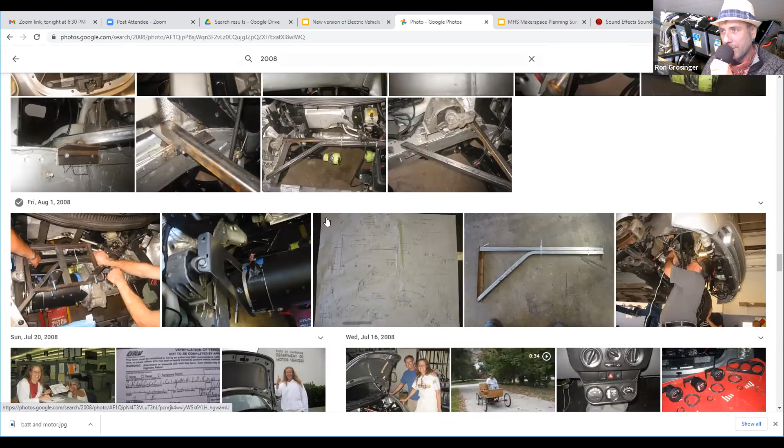So that was 12 years ago, and since then I took some of the things we learned. Like, here's an example right here. This is the original transmission. Can you see my mouse?

Yes. Okay, this is the original transmission. We made brackets and we installed a DC motor. And we put the batteries on top, but we made it all removable. That's a key thing you have to think about, because you might upgrade later, or you might have to do some servicing. You definitely want to make it serviceable.

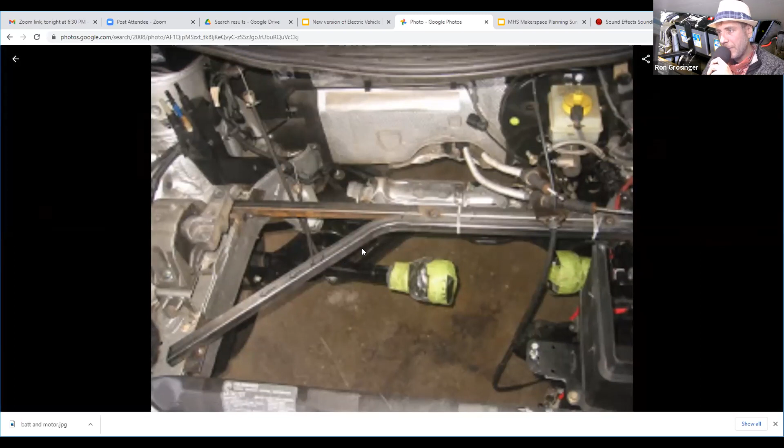You don't want to weld right to the chassis - that's an amateur move. You definitely want to weld your brackets, but then bolt it to the chassis. And that's something I tell people all the time. So here was the bracket that we made that carried the batteries on top of the motor.

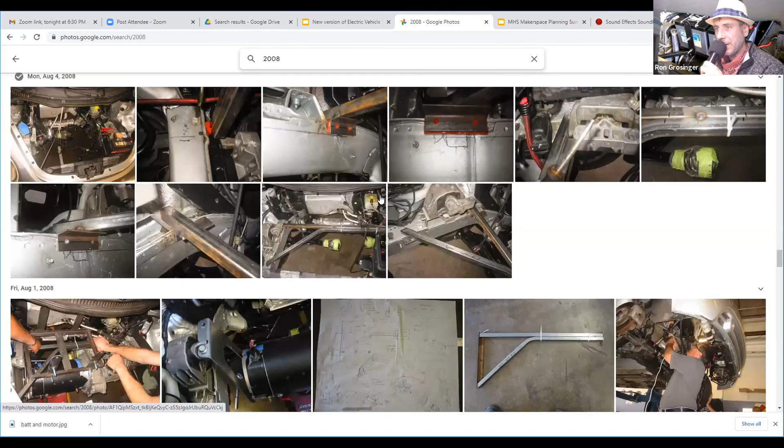It was a precarious setup because, you know, Volkswagen - you got to think, you're working with Volkswagen and you're working with just a DIY shop, your brain, some drawing ideas, and you're coming up with ideas of how to fit everything. Now, before I get ahead of myself, I should probably talk to you about the basics. And obviously we did some cameo shots, like when we had the engine out, we would stand in the engine bay and all kinds of stuff.

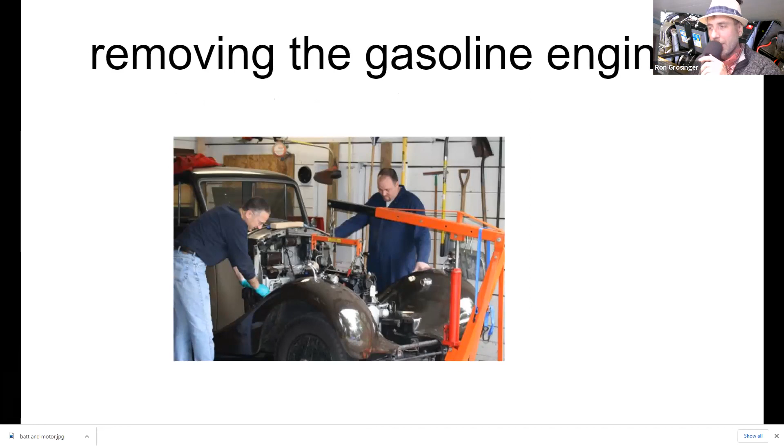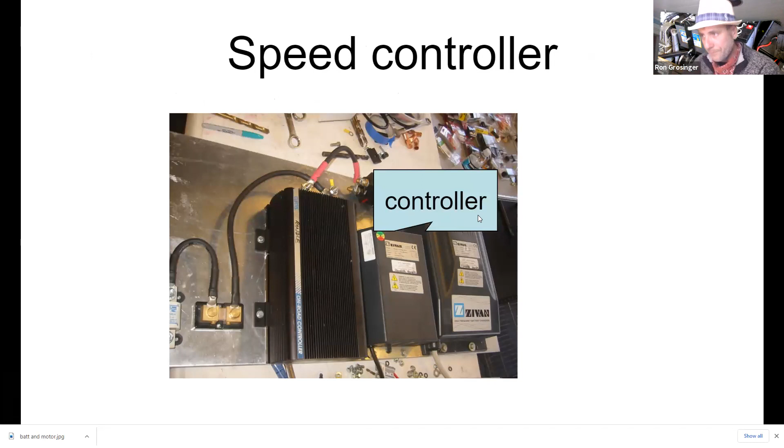To convert a gasoline car, you would start by removing the gasoline engine. I know this seems simple, but I don't know where everybody's at, so I'm making it very broad, okay? You would remove the gasoline engine, add an electric motor, and you're going to need an adapter plate to get in between. You're going to need a controller, which is right here, and then you're going to need batteries.

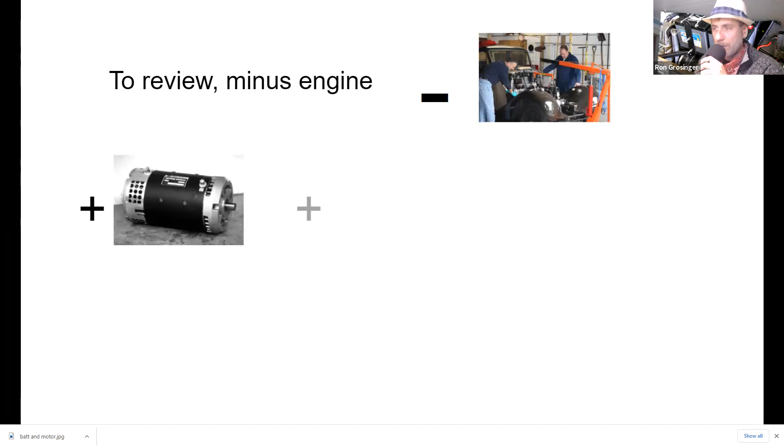So literally, it's minus the engine, plus a motor, plus a controller, plus batteries equals an electric car. I know that's very simple, but that is literally what's going on.

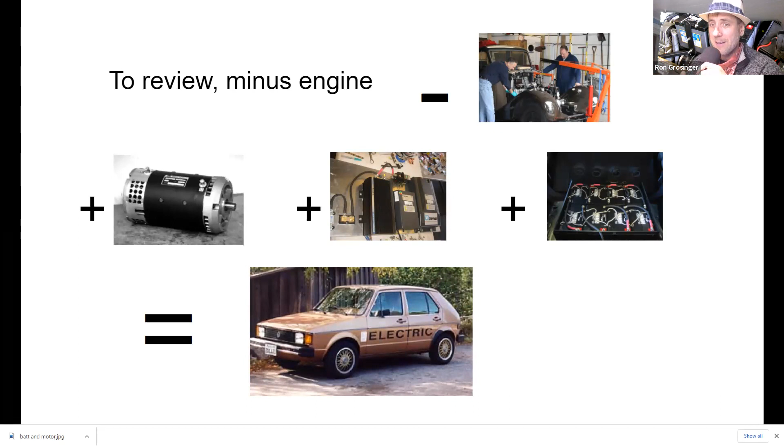Now, how you connect all these parts, that's the hard part. That's where you need welding, metal fabrication. You might need some CNC or machining because you need to get some adapters. Now, some of this stuff you can buy, and we'll get to that.

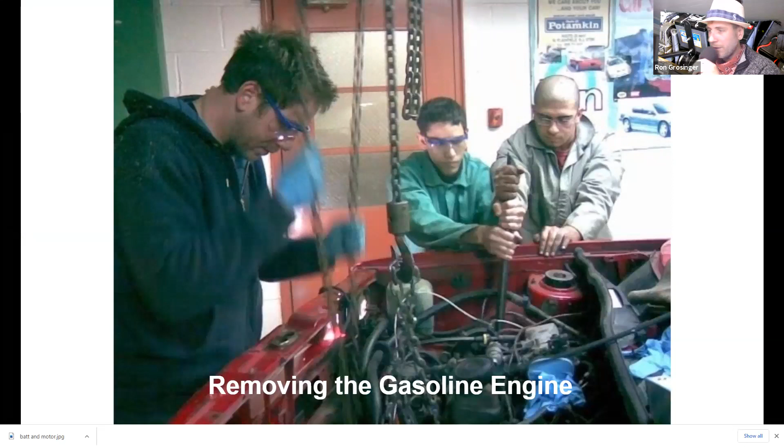So then I took all that knowledge and I brought it to the students. That girl there is like 15 years old at the time, and believe it or not, she did a lot of the wiring. And then that's us pulling the engine out. Literally, it's like get the chains hanging from the hoist and just go.

What car was it? Oh, that was a 1990 Volkswagen Rabbit—yes, and that's so it's a Cabrio. That's a good candidate because it's lightweight and relatively safe, and you can pick them up relatively cheap. We only paid $750 for this, and I drove it.

It drove great. I also see that you removed the tank, right? Yep, which I didn't mention before, but you can also use the space for batteries. 100% right—we did use the space, but you don't need this, so you might as well get rid of it. Anything associated with the gas engine—the radiator, the exhaust manifold, the catalytic converter, the muffler, the pipes, the hangers—everything associated with that is now your space. You now have that to do what you want with it.

And I know that Matt has done a lot of this stuff as well, and I'm sure he's taken advantage of the empty space once something is taken out.

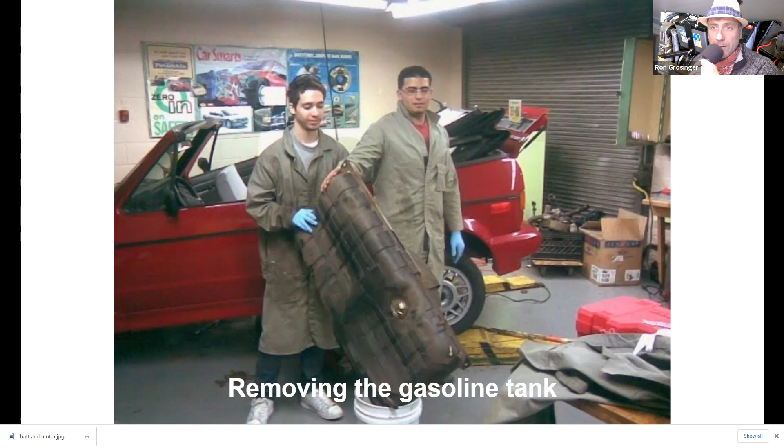Now, as far as wiring goes, it seems confusing, but believe it or not, if you just lay this out on a chalkboard and follow the steps, there is a simple pattern that has to do with fail-safe—it's like an if-then statement, for instance.

I'm not going to go too deep into the electrics because you just got to know that it's all logical. If you're plugged into the wall and you're charging, you should not be able to drive away. I know that sounds funny, but that's called a charger interlock, and there's a relay set up for that. Same thing: if the car's in drive and you go to start it, it's not going to start.

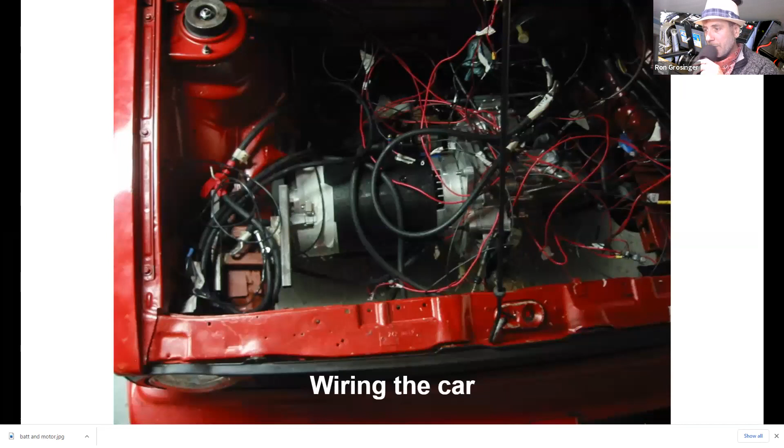That's kind of like an old automatic transmission idea. There are safety protocols that you should put into the car when you're building it. The wiring looks like a big mess, but if you just stay organized and label everything, you're going to be fine.

What you're looking at here is an electric motor with an adapter plate hooked up to the original transmission. You're going to keep the transmission most likely. There are situations, though.

The Tesla has one gear. Why? That's got to be someone's question. You have a DC motor here, that's true, but even if I had an AC motor, unless it's the size of a Tesla AC motor with a Tesla battery pack size, I can't get away with tossing the transmission. Here's why.

Everybody here has ridden a bicycle before, right? Let me expand this so I could see everybody.

If you're riding a bicycle, when you put it in first gear, it's super easy, but there's a limit to your legs going up and down. So it's easy, but there's an RPM limit. What do you do? You switch gears, go to the higher gear. Now it's hard, but you're faster. Same thing with a gas car and same thing with an electric car—you put it in first gear because it's easy, but then there's a limit, so you have to switch to get to that next step.

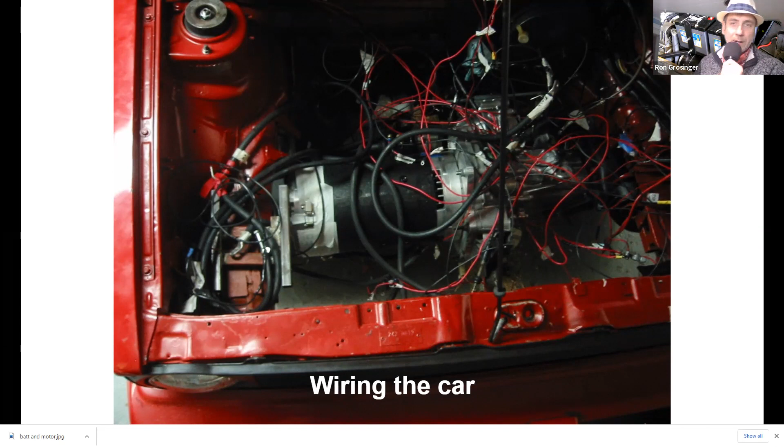But it's not just Tesla that has one gear—pretty much all manufactured electric vehicles have a single gear other than the Taycan. What's happening is you're looking at the result of Tesla setting the bar high. Before that, Tesla originally had two gears, and all the conversions used the original transmission. Then when they got into the ability to have such a large pack and such a large motor, they got into high torque, and then you're allowed to use one gear, but that one gear had better be tough. In fact, the story I heard is they kept breaking transmissions, and then BorgWarner, a massive transmission manufacturer, heard about it and made a prototype for Tesla, saying 'don't hurt yourself, we'll make the transmission, take it easy' — because you got to go to the experts.

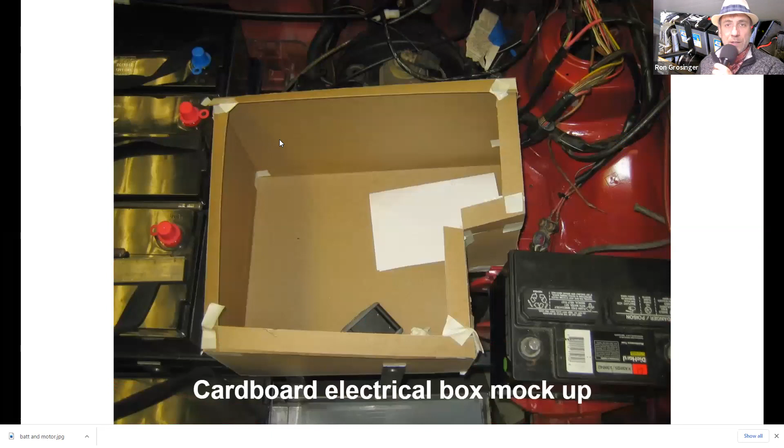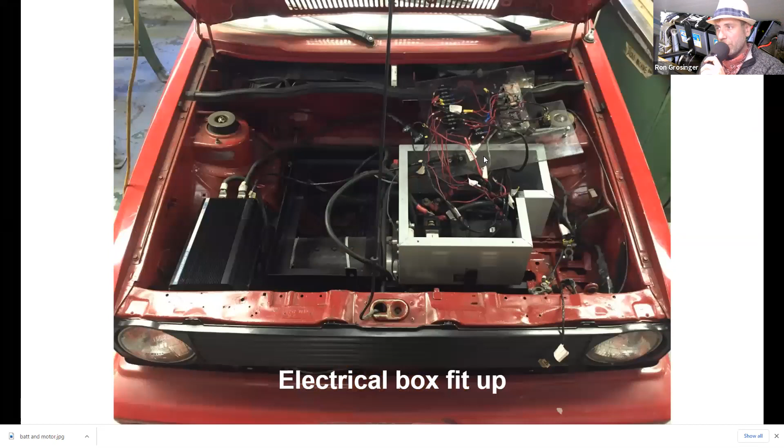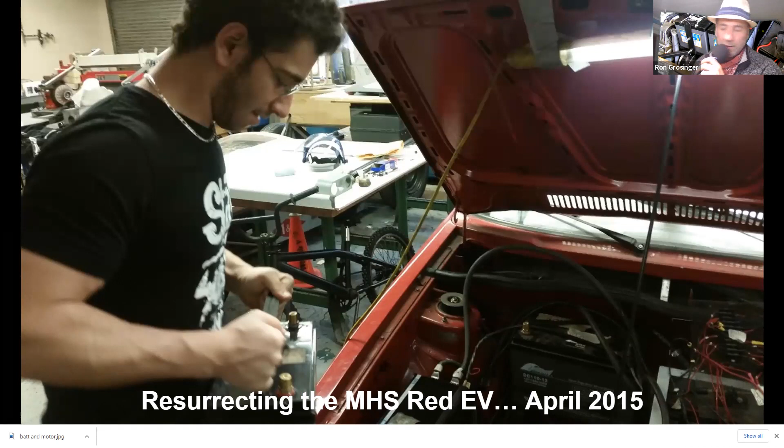We finished it in 2009, and around 2015 we did a resurrection — we took all the batteries out. Believe it or not, the batteries actually cracked. We sealed them, refilled them, charged them, and refreshed it — you know, there's all the acid and whatnot.

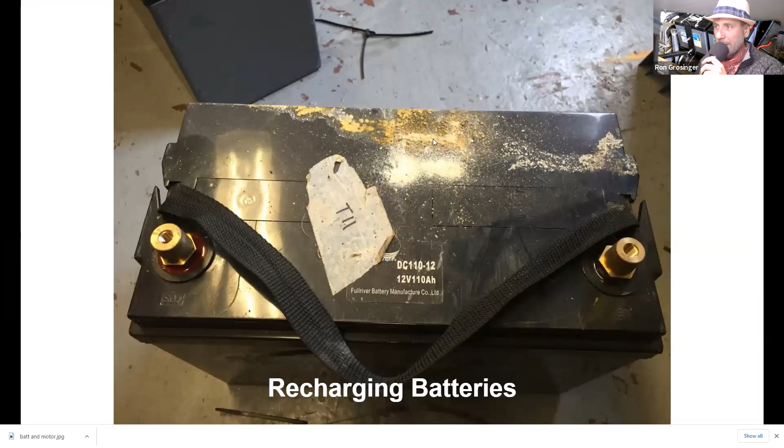We did a nice refresh, and then we put it all back together.

Tell him I said hi. Actually, get me in touch with him if you can.

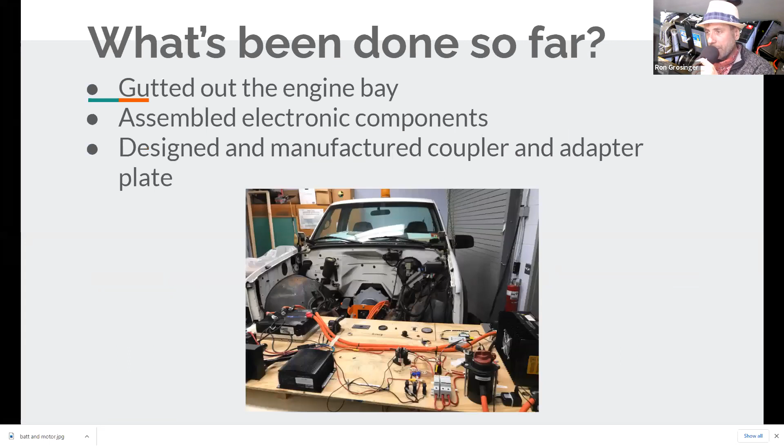Okay, now I'm going to go a little faster through this. This is the truck we started to do at the college.

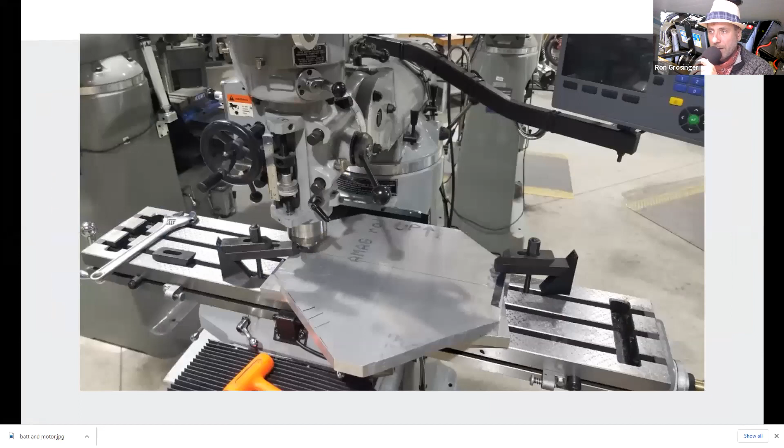We made our own coupler, we made our own parts. We machined stuff, it was more of a metal fabrication, and we did engine turning. There's your coupler in there. This is your adapter plate, this is what an adapter plate kind of looks like.

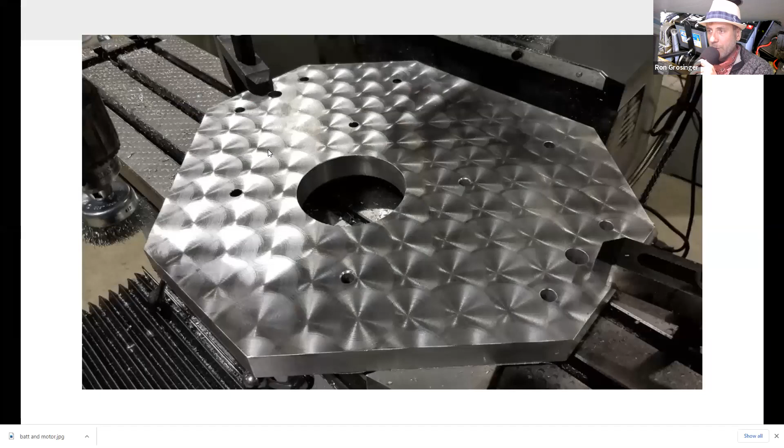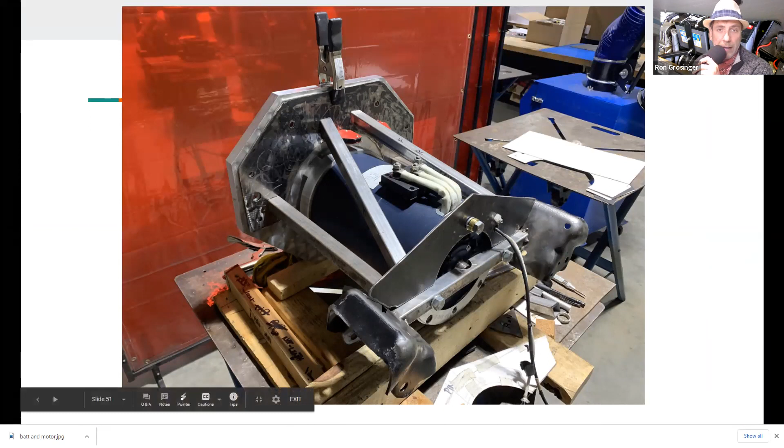This is a bracket we custom made. We welded it up and put it in there. This has the original engine mounts and stuff like that. So that's basically the overview of that.

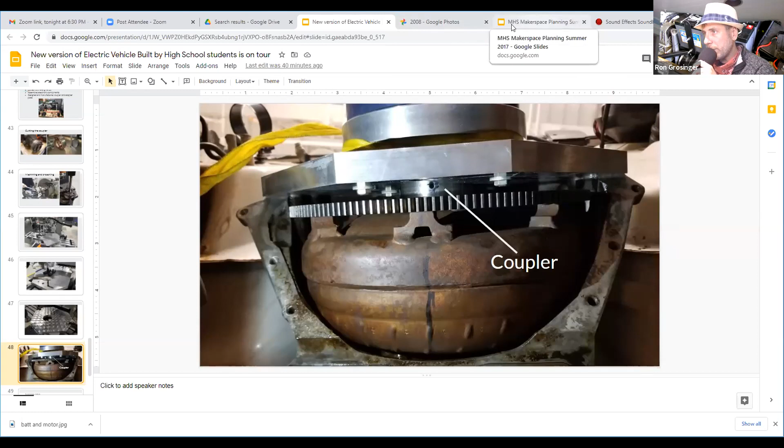The only other thing I wanted to show you was I recently bought a Fiero.

Yeah, so this is my segue. Let me make sure I've got the photos ready to go. And then I thought it was ready, sorry. Let me see, where is it? Okay, hold on. Oh, here we go, there we go, okay.

You got to think to yourself, well, it's pretty expensive to do this car. So you're talking, it's a commitment. I would say don't do this unless you really love the vehicle or love the process, or you're trying to learn, or it's a demonstration vehicle of some kind.

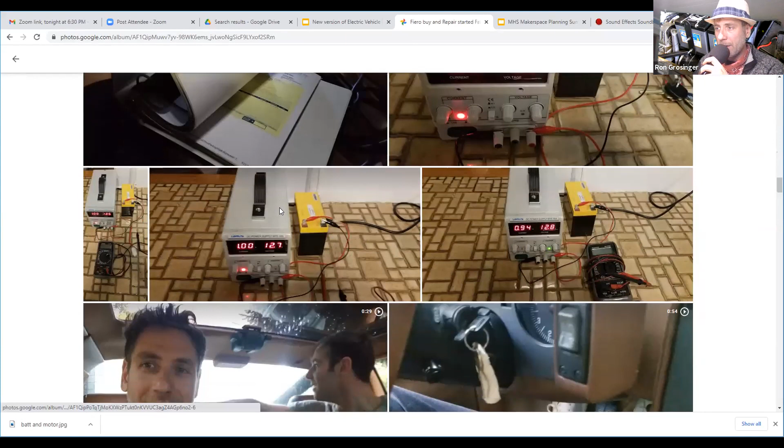So I wasn't ready to commit to my own vehicle, so I bought someone else's. Now, believe it or not, this car has $25,000 worth of equipment, like batteries, motor, speed controller, lots of odds and ends. And believe it or not, this car went for sale on eBay for, here you go, I paid $1,800.

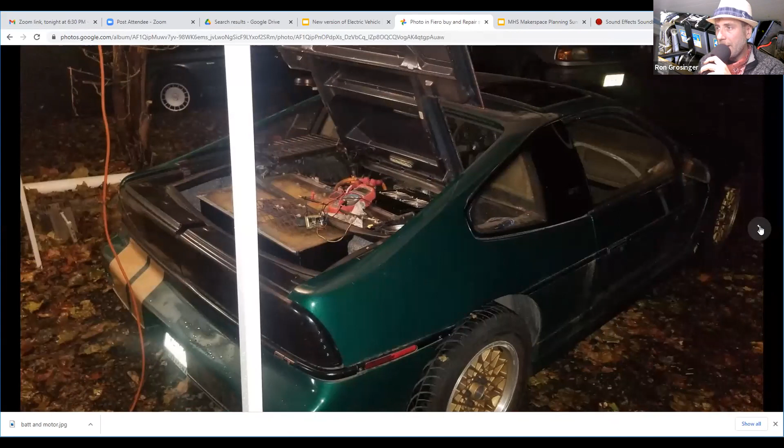And why is that? Because the guy let it sit, he let the main 12-volt battery die, and I scooped it up. I cleaned it up, got it back on the road, and made some videos about it. I tested some things, and I got to tell you, you could do that. You don't have to build your own, you could modify. This thing was well cared for, except for letting it sit for about 6 months.

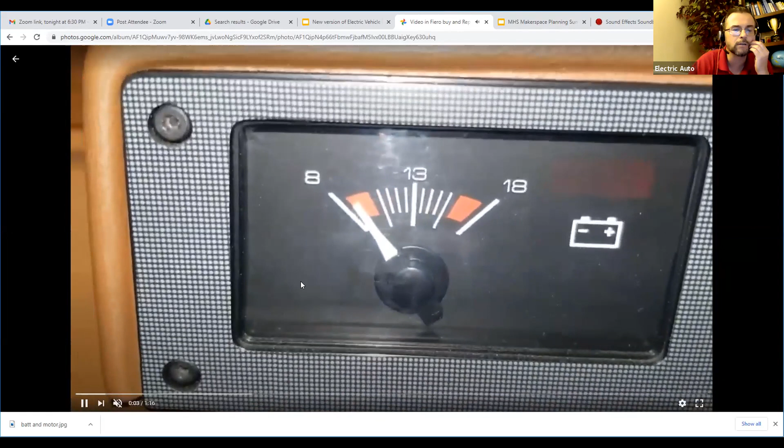But the inside is super nice. Can you guys see this video? Super lucky, you may not have it optimized for video. The sound is off, I turned the sound off, but you can see that it's in good shape.

Yeah, so anyway, that's basically it. But the lesson is, which model year is the original vehicle? 1988, yeah, it looks the age. So what I would say to you is that you got to start somewhere.

And what I would say is you don't have to start at the beginning. You could start with something already built, or something else that Matt and I have done is some classes. We did 2 classes.

They were crash course, 6-hour classes, where you come to class and we teach you all the critical parts, like the relays, how to measure, what to look for, how to make a battery pack, and we kind of go over the whole thing. It's not going to give you everything you need, but it's definitely going to give you a good taste of what it's like to go through this.

We also talk about suppliers. I like EV West, however you could source your own stuff, right? EV West is very well established, and I remember you told me they have the kit for the old Beetle. The problem is it's so difficult to get an old Beetle.

Very difficult. What you could do is get maybe a variation of the Beetle, maybe a Karmann Ghia, maybe a sand rail, although there's nowhere to put the batteries. You could get a bus, it's not easy, or a kit car of some kind. But the idea is that would be the simplest starting point.

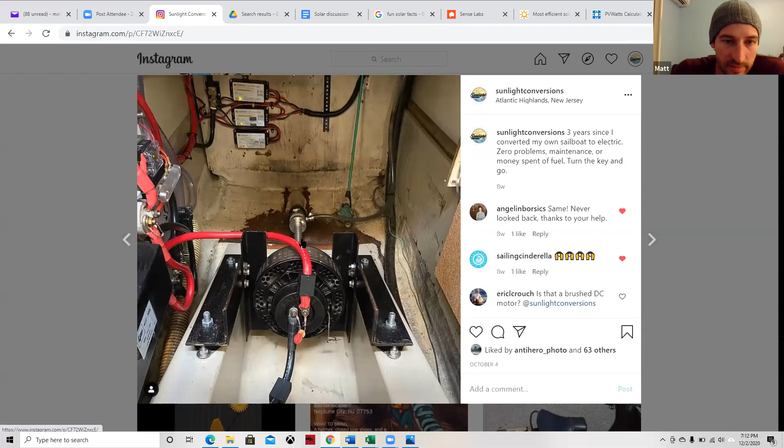Instagram page, yep. So here is where the motor or engine used to be, it used to be an 18 horsepower diesel, and it's replaced with a 7.5 kilowatt DC motor. And I'm going direct drive here, so I don't have any gears, it's literally just the motor straight out to the shaft and the prop.

So boats are all the same exact components that Ron mentioned, which is pretty cool. It's anything electric - batteries, a motor, and a controller. That's pretty much all you need.

In a car, you need a lot of power to accelerate, but then once you get up to speed, you don't need as much power. Boats are completely different, you always need constant power. For a displacement boat, which is kind of like a typical sailboat with a displacement hull, for every knot you go faster, it takes twice the amount of power. So that adds up real quick. It doesn't take much power to move a boat slow - if you're going let's say 2 knots, you could do that for maybe 300 watts.

For our surface people, how does it translate to miles per hour, let's say? A knot is like 1.2 miles per hour, it's just slightly faster.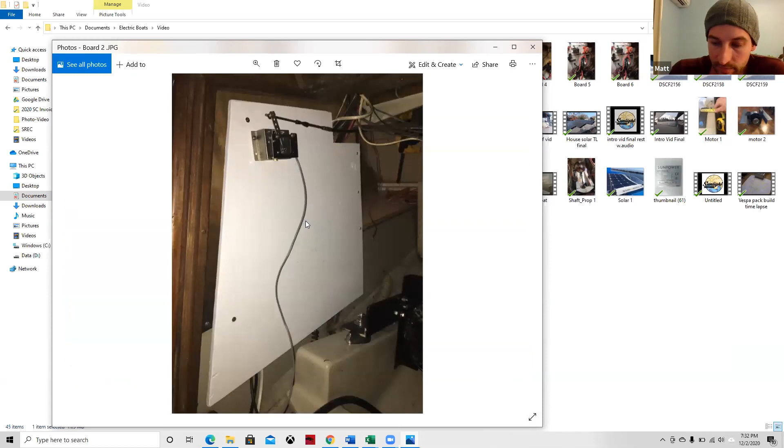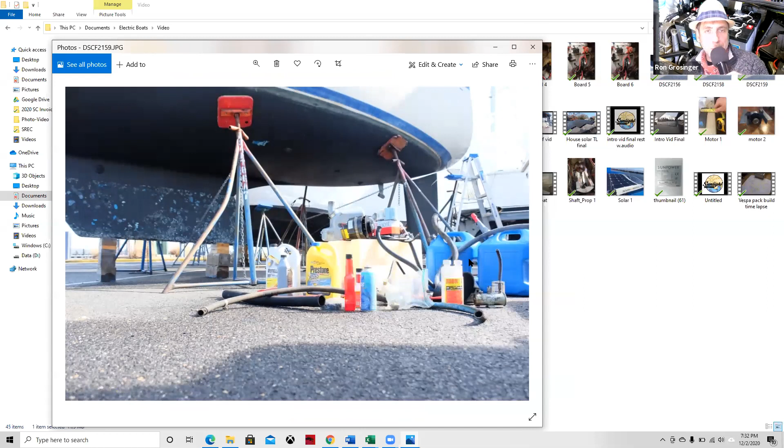They're much safer, so a lot of people use them on boats. This is the controller, you've got your throttle. I like what he did here, it's all laid out really nicely, stuck to a plastic wall. It's a pretty good layout. Pile of stuff you no longer need - that was the old 18 horsepower diesel.

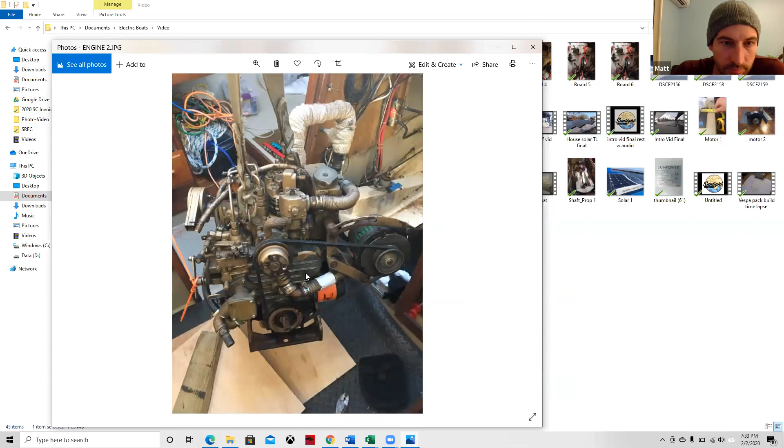Now, speaking of diesel engines for boats, do they have to comply like cars do? No, it's actually a tragedy - they don't have catalytic converters and oxygen sensors. Now they have a few things, but there's hardly anything. The reason you don't really notice it is because the exhaust goes into the water. If you ever started a boat on land, you'd be horrified at what comes out of it, but people don't see or smell it as much because it's a wet exhaust - water gets pumped in, mixed with the exhaust, and goes back out. So the stuff you're directly putting in the water, it's crazy that we allow it.

Oh my goodness, I didn't know that. Yep, and every boat leaks oil, so it goes to the lowest part of the boat, which is the bilge, and everyone has a bilge pump. So you're constantly dumping oil out into the ocean, every single boat, all day long. If you ever walk around a marina, all you smell is fuel, all you see is fuel in the water. But that's where we're at today.

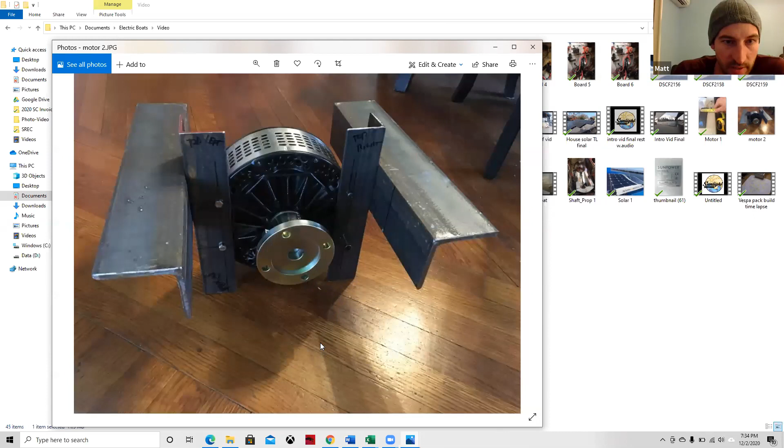Just go through some random pictures here. So that's the motor, oh, there's your coupler. And that's all there is to it.

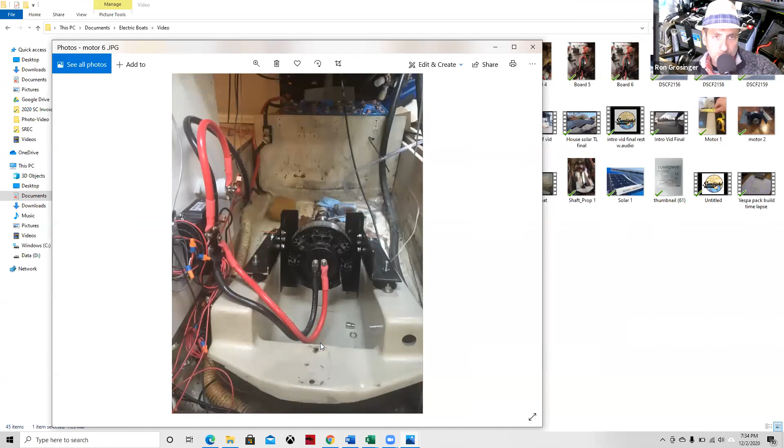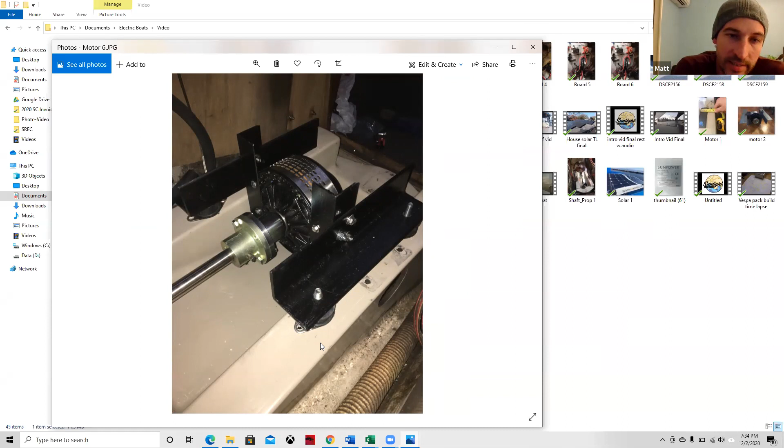I'm actually in the process of changing this from direct drive to a reduction gear. The reason being, electric motors are most efficient when they're spinning the fastest. A motor is rated by its RPM per volt, so the RPM is directly related to the voltage. Let's say it's 50 RPMs per volt - for every volt, it's going to go 50 RPMs.

So at the end of the day, watts is what gives us power. Volts times amps equals watts. So you can either use high volts and low amps, or low volts and high amps. The amps are what cause the heat with resistance, and that's where you lose efficiency. So you want to keep your voltage up, but your amperage low.

So by putting a reduction gear in, it's going to be a 2-to-1 reduction gear, so I'll spin the motor twice as fast. And then I'm going to put in... I actually have it right here. This was my prop. Oh, I got to stop screen sharing, right?

So spinning the motor faster means that you actually have more voltage and less current? Correct, yep. So that makes the motor happy. You want more volts, less current, but a propeller is most efficient when it's spinning the slowest. So I went from a really small prop that I would spin really quick, to now I'm going to go to a really big prop that I'm going to spin at about half the speed.

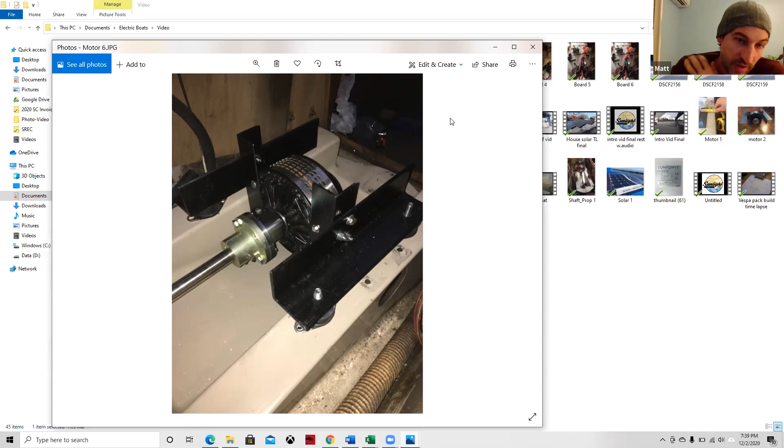Oh right, so most motors are radial flux. This is axial, so it's why it's wider but shorter. Companies are moving this way because it's a more efficient way to do it.

There used to be this - go ahead, sorry? There used to be a cartoon on MTV called Aeon Flux. It just made me think of it, I don't know why. Go ahead, carry on.

So the batteries, where do you position them in the boat so that they're as low as possible, but not where they get wet? They're in the space that the gas tank used to be. I saw the picture of them, but it was hard to tell what part of the boat that was, because I don't know where gas tanks go. It's literally where the seats are.

Like you sit next to them. Okay, so it is up high then. Okay, it's not on the bottom of the boat. You get to have lunch with the batteries, they could be your armrest. No, they're completely hidden, you can't see them. So the motor sits right behind the batteries. Okay.

Are these 16 cells? Yep, 16 cells, so 3.2 volts each. You put them all together and it's like a 52 volt nominal. Good. So there's the motor, and this is where the gas tank used to be, and that's where the batteries are.

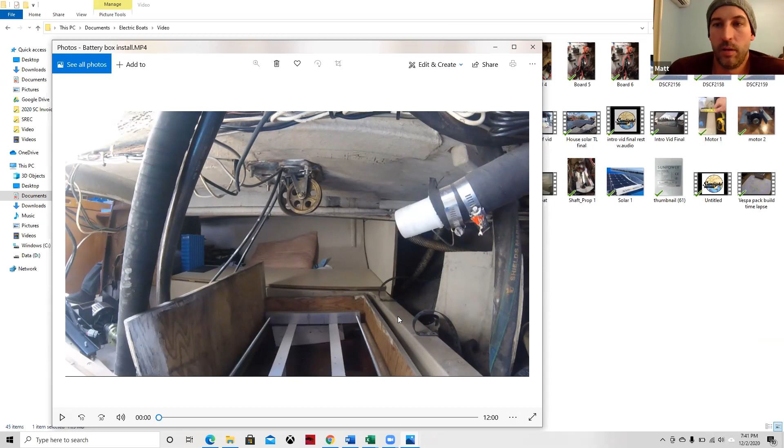I guess compared to the size of the boat, the batteries really are not large at all. They're quite small. I mean, I could definitely fit more. And if these were Tesla batteries, they'd be about a third of the size, which is crazy. Yeah, a third the size and a little bit less than half the weight.

Oh, I'm gonna have to run in a second, but I got a quick question for this group. You think it's worth me... I want to wait for the Cybertruck, but do you think it's worth me leasing the Model Y for 3 years while I wait for the Cybertruck, or do you think it's not a good idea? Just buy it outright. Oh my goodness.

That's a whopper question. I personally hate leasing, but if you're getting rid of it in 3 years, then that might be the best option. So I don't know. Join the Model Y Facebook group and ask the question there, you'll get good answers. I know people are leasing it and they've had good reasons for doing it. Okay, all right, fair enough.